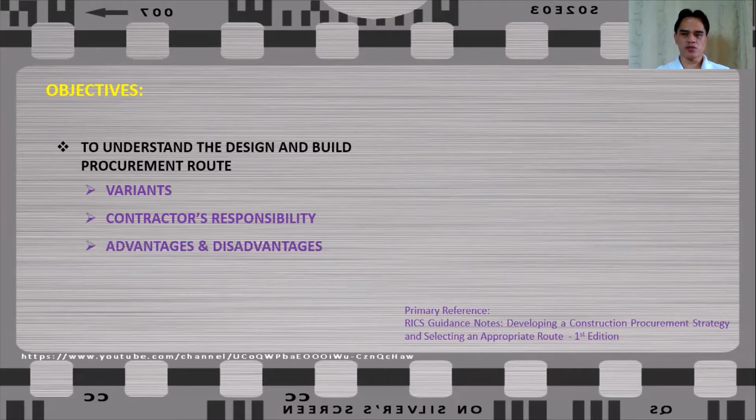Our objectives for this discussion are the following. First, we would like to understand the design and build procurement route, what are its variants, the contractor's responsibility, the advantages and disadvantages of this route, and the organizational structure.

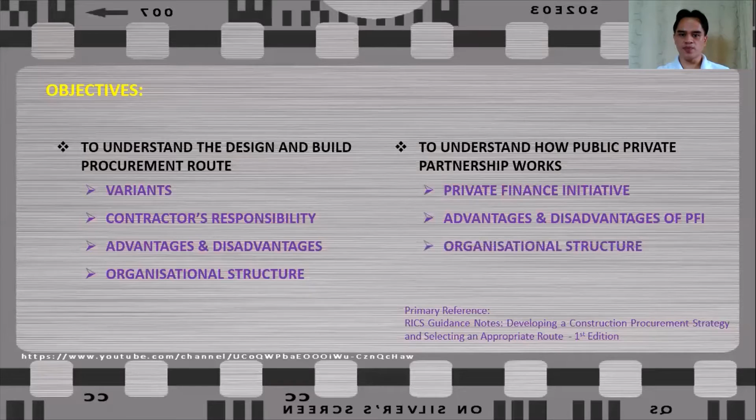Similarly, we would also like to understand how public-private partnership works, particularly the Private Finance Initiative, or PFI. We want to know the advantages and disadvantages of PFI, at the same time the organizational structure of PFI.

So let us begin with design and build procurement route. This is a procurement route where the design and construction process is combined under a single entity or contractor, who will assume the risk and responsibility for designing and building the project, usually in return for a fixed price lump sum. I would like to highlight usually, because there are still several types of contract that are applicable to design and build. It's not only fixed price lump sum.

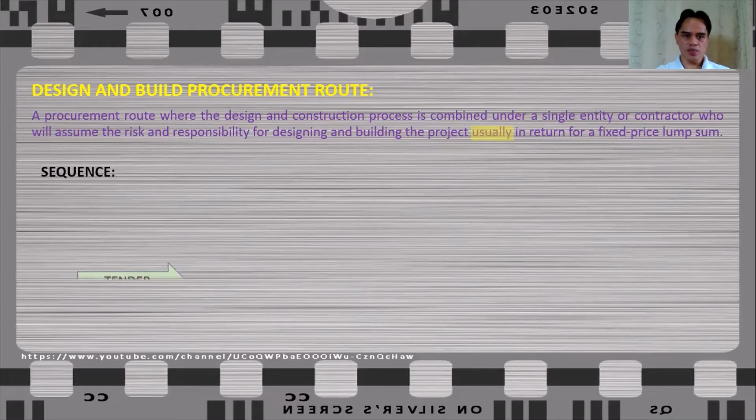So the sequence of activities under D&B are that first, the tender can commence even before the design is completed or even there is a design at hand. And once the contract is awarded to a contractor, the design can be completed by the contractor, but the client has a limited control over the design. In some instances, the client can also hire a client team to provide a concept design, and this concept design will be the basis of contractor's submission.

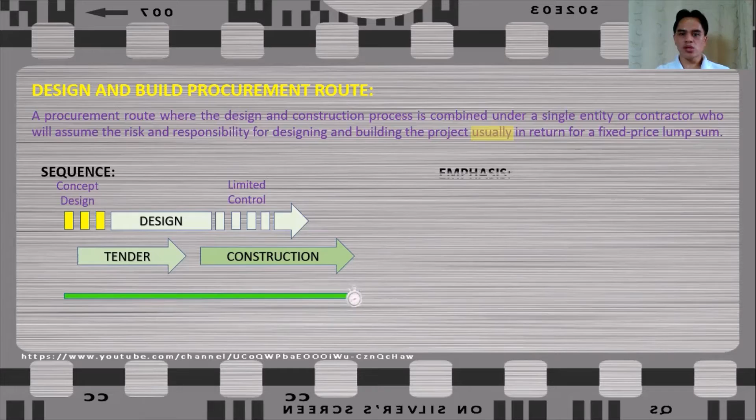Because of these overlapping works, the time to complete this project will be shorter compared to other routes. And because also that the client has a limited control over the design, and the time to complete is shorter because of overlapping works, the emphasis of this route is on cost and time.

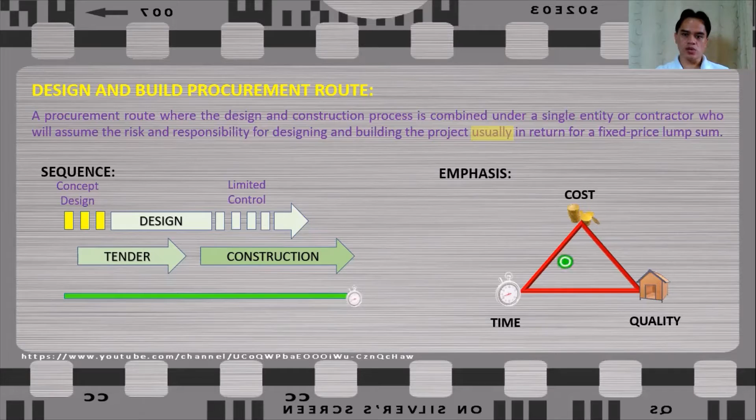Design and build procurement route has several variants. It could range from complete package, where the contractor will be left to interpret the requirements of the client, and in some cases, the contractor will be responsible for obtaining the planning permission or even project funding. The client have little influence over the design once the contractor's interpretation of client's brief is agreed.

And there is also another variant called develop and construct. In this variant, the client will employ a design team to carry out some preliminary design work and prepare project brief, and other tender documents including employer's requirements.

The contractor develops a design from the detailed brief or specification provided by the client. And the contractor assumes responsibility of completing the detailed design and constructing the works.

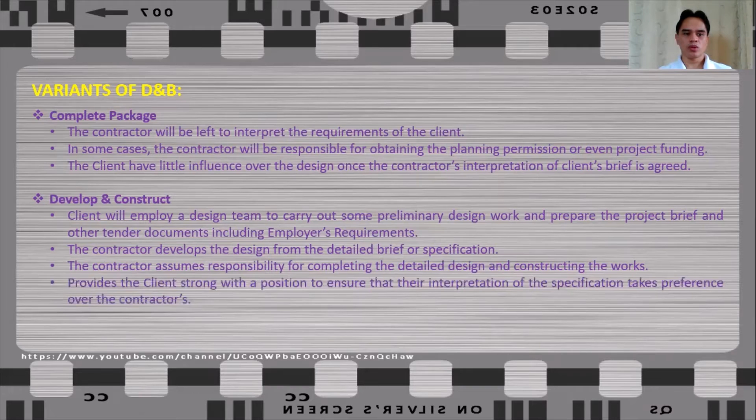This provides the client a strong position to ensure that their interpretation of specification takes preference over the contractor's interpretation. And sometimes, the successful contractor will assume responsibility of the design team initially hired by the client and agrees to novate the contract the client has with his or her designers to the contractor.

So we have several terms here. We have employer's requirement and novate. Let's dig a little bit deeper to understand what are these terms meant.

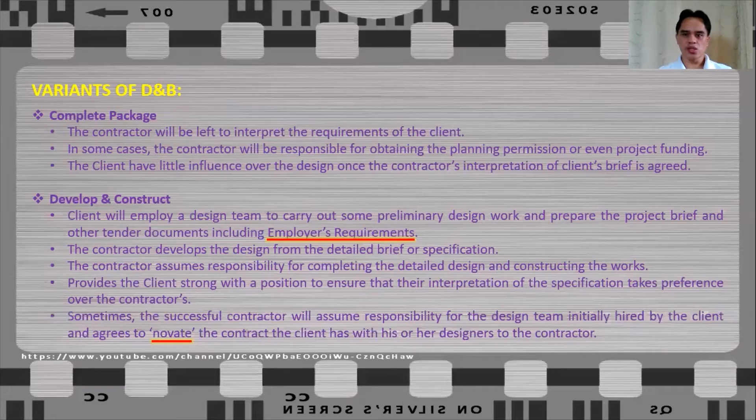Employer's requirement are documents produced by the employer to set out its requirement in relation to the project. These documents may include performance specifications, drawings, initial designs, and so on. The employer's requirement will be the basis of contractor's tender submission.

Novate or novation is the transfer of rights and obligations that one party has under a contract to a third party. It allows for risk and obligations to be transferred and not just the rights. Another way to transfer the rights under the contract to a third party is through assignment of the contract.

Assignment is the transfer only of rights that one party has under a contract to a third party. Since only the rights are transferred under the assignment of contract, the original party to the contract still retains the risk and responsibility that he has under the contract.

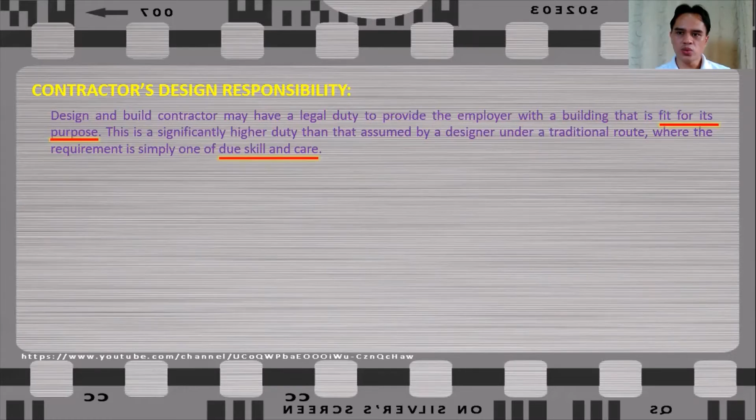Due skill and care is a contractual obligation to carry out the works with reasonable skill and care. This creates a performance obligation, equivalent to standard of care in negligence. So how can a contractor prove he is not negligent, or that he carried out the works with due skill and care? The common law test for negligence provides that a contractor is not negligent if he carries out his work to the same standard that another reasonably competent member of the industry would have met. Meaning that if a contractor can prove that other competent contractors would have done the same as he did, then he carried out the works with due skill and care.

Fitness for purpose, on the other hand, is an obligation to impose a duty of result. The contractor, or design and build contractor, will be held to that obligation regardless of the reason why the work or design does not meet its intended purpose. In other words, matters beyond the control of the contractor will not excuse the contractor from that obligation, unless there is a contractual term to the contrary, of course. This takes the contractor or designer beyond the duty to exercise reasonable skill and care in carrying out the works, and instead imposes an absolute obligation to produce a result.

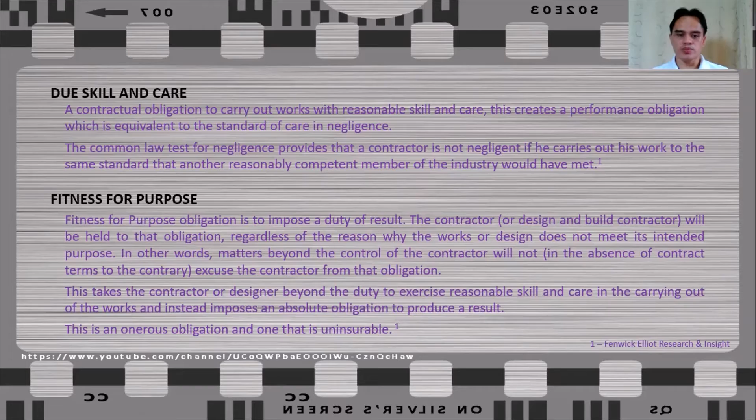Let us now talk about the advantages of the design and build procurement route. The first advantage is that there is only a single point of contact for the client. Thus the client has only to deal with one firm, giving single point of responsibility and significantly reducing the need to commit resources. And also because of the single point of contact, the client's risk is reduced. Next is that the constructor's expertise can be utilized in the design and project planning, because this strategy enables an integrated constructor contribution to the design and planning of the project.

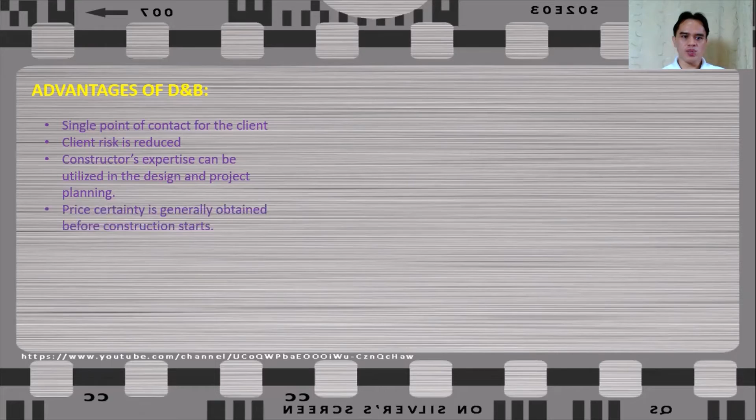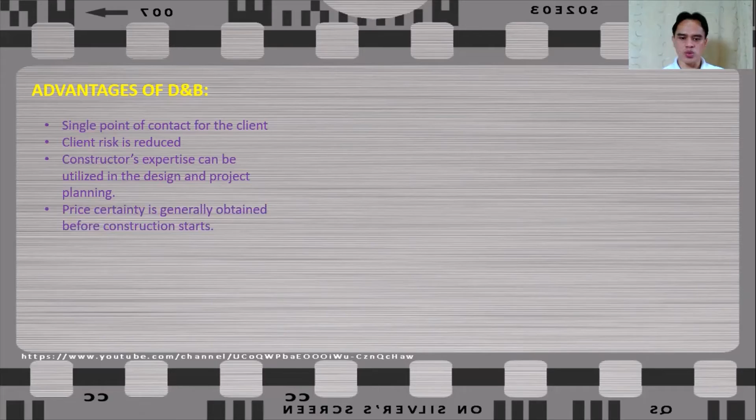The next advantage is that price certainty is generally obtained before construction starts. That is, of course, provided that the client's requirements are adequately specified and changes will not be introduced. And the total time to complete the project may be reduced because of overlapping of activities. So these are the advantages of the design and build procurement route.

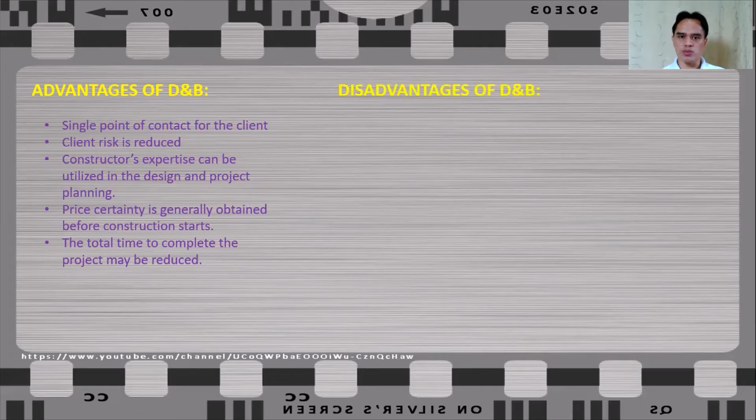Let us now see what are the disadvantages of this procurement route. First is that the client may face difficulty in preparing a comprehensive brief or employer's requirement. This is true particularly for clients who are not accustomed to construction. They find it difficult to describe what it is really that they want.

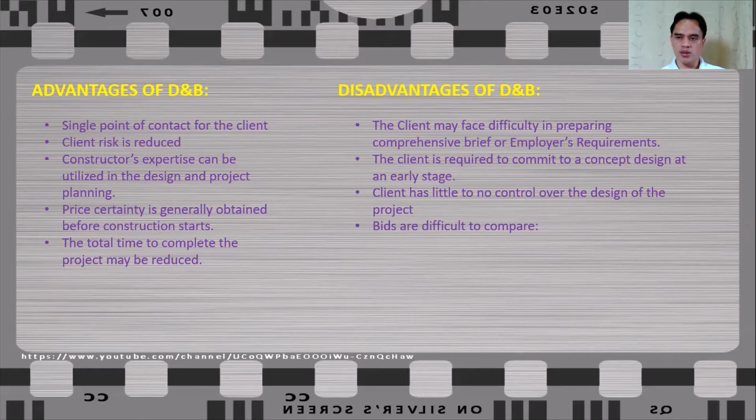The next disadvantage is that the client is required to commit to a concept design at an early stage, especially since the detailed design is not even completed or not even started during this early stage. The client has little to no control over the design of the project. Therefore, the quality may be compromised as the client relinquishes its control to the design and build contractor. Bids are difficult to compare because each design will be different, and prices and the project program will vary depending on design. There is no design evaluation unless a separate consultant is appointed by the client for this purpose.

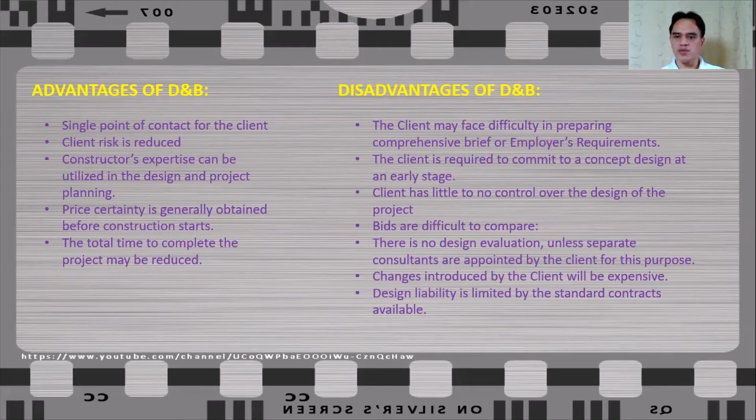The next disadvantage is that changes introduced by the client will be expensive, and the design liability is limited by the standard contracts available. Last is that this route may result in a project having less aesthetic appeal, where price and space dictate how the available budget will be spent. So these are the advantages and disadvantages of the design and build procurement route.

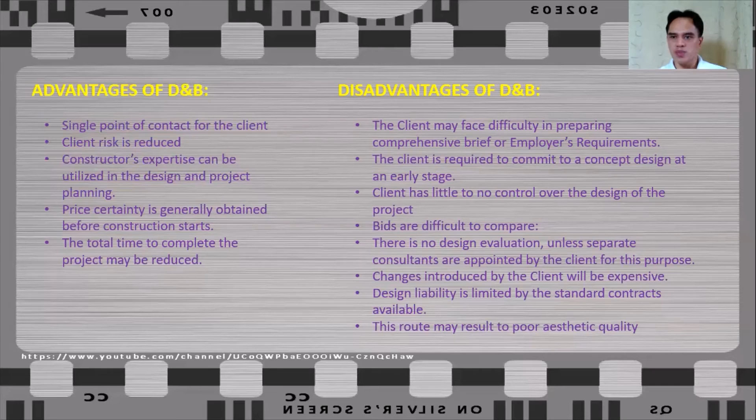Let us now take a look at the organizational structure of the design and build procurement route. The client will hire an advisor or client's team. These advisors will only be directly linked to the client, and their objectives may include the preparation of preliminary or concept drawings, project brief, and contract documents. If a complete design and build package will be taken by the client, advisors may be responsible for reviewing the contractor's proposal, including the contract, prior to finalization.

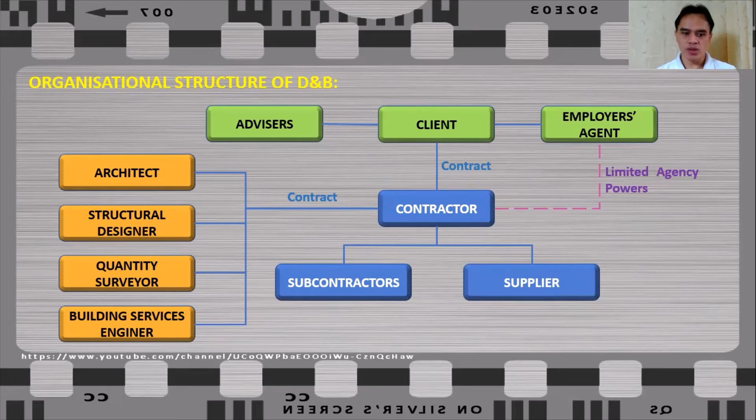The client then will hire the contractor, or will have a contract with the contractor, and the architect, structural designer, quantity surveyor, and other building services professionals will all be directly under the contractor, or will have a contract direct with the contractor. The same as the subcontractors and suppliers, they will all be directly under the contractor. During the course of the construction, the client may hire an employer's agent, and this employer's agent will only have limited agency powers over the contractor. So this is the organizational structure of the design and build procurement route.

Let us now go to public-private partnership, or PPP, particularly on private finance initiative, or PFI. PPP is a collaboration between the public and private sector for the delivery of public service and infrastructure. PPP can take various forms, the common of which are private finance initiatives or PFIs, concessions, and joint ventures. Other forms of PPP may include integrators, strategic infrastructure partnerships, and other hybrid approaches.

Note that all PFIs are PPPs, but not all PPPs are PFIs, because again, there are other forms of PPPs available. And in this discussion, we are going to focus on private finance initiative or PFI.

Let us now take a closer look at private finance initiative or PFI. A PFI project involves a long-term contractual arrangement, usually of 25 to 30 years, between public and private sector parties through a concession agreement. And the characteristics of PFIs are: the private sector agrees to finance, build, and operate an infrastructure project such as hospitals, schools, roads, and so on.

Even a prison institution can be carried out through PFI procurement route. And a PFI is a long-term life cycle investment and includes routine maintenance services. Sometimes it may come together with soft services such as catering and cleaning. The public sector will use the project without the need to engage with its operation. And usually, a PFI is achieved through the creation of special purpose vehicle or SPV.

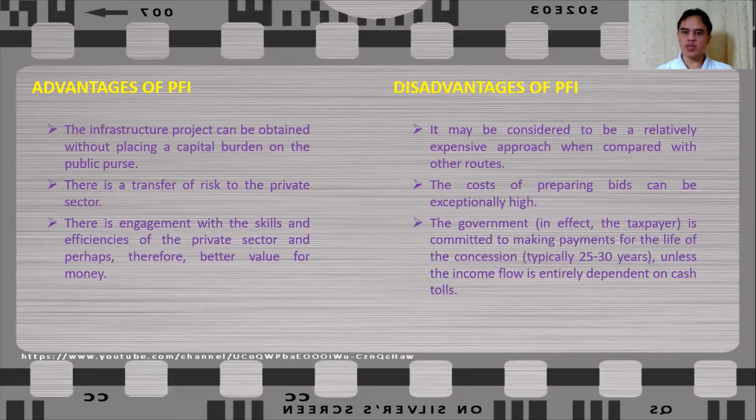The next disadvantage is that the cost of preparing bids can be exceptionally high. Then the government, in effect the taxpayer, is committed to making payments for the life of the concession, which is typically between 25 to 30 years, unless the income flow is entirely dependent on cash tolls.

Let us now discuss the organizational structure of PFI and see how it works. The host government will have their advisors, which will provide guidance to the host government on matters pertaining to the project. And once everything is approved, the host government will then have a concession agreement with the SPV. The designers, constructors, specialists, suppliers, operators, and other entities that are involved in the project will be under the SPV umbrella. The SPV will then look for funding.

Some of it will come from sponsors or equity shareholders, which will have a share or stake in the SPV. Additional funding may be obtained from lenders, which will have a long-term agreement with the SPV. There will also be insurers that will provide insurance policies for the project. If it is a non-toll-based project, the host government will provide payment to the SPV in a form of annual or unitary payment, which may include shadow tolls.

To explain what a shadow toll is, let's take, for example, a non-toll road project. The payment will be made by the host government based on the type and number of vehicles that use the project. It is the host government that will pay the SPV, and the payment will not be directly collected from the end users. Now, if it is a toll-based project, the cash tolls will be collected by the SPV as their stream of income. So this is how the PFI concession agreement works.